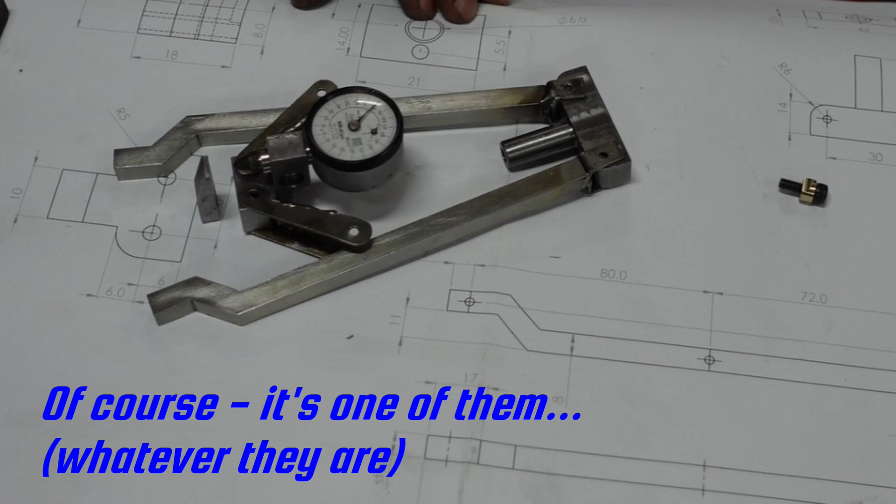G'day. Today I'm building a new tool which will hopefully help me measure diameters, particularly in a situation I'll get to in a moment. I've got several ways of measuring diameters here in the workshop, and I'll show you a few of those, but this is something I've been trying to work out for probably 4 or 5 years now, so it's a long time coming. I'm a bit time poor at the moment, so I haven't finished. Sorry about that. I'd like to get things done in an episode, but sometimes it doesn't happen, and there are lots of parts in this one.

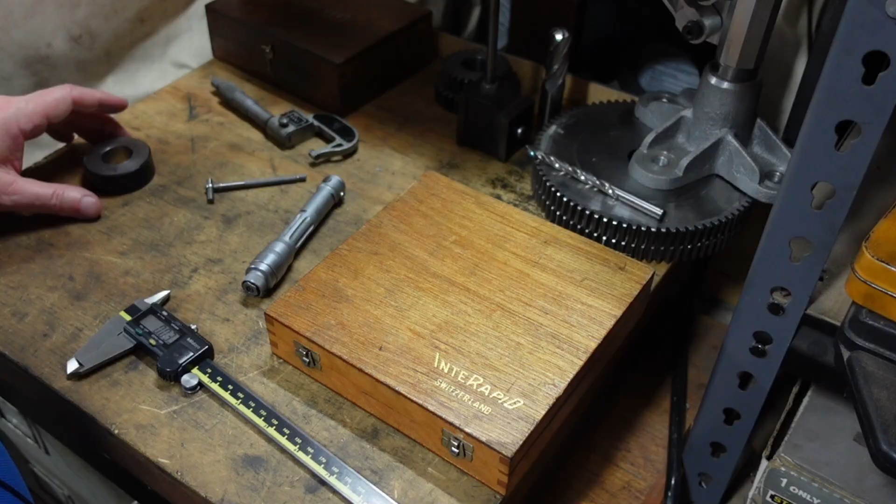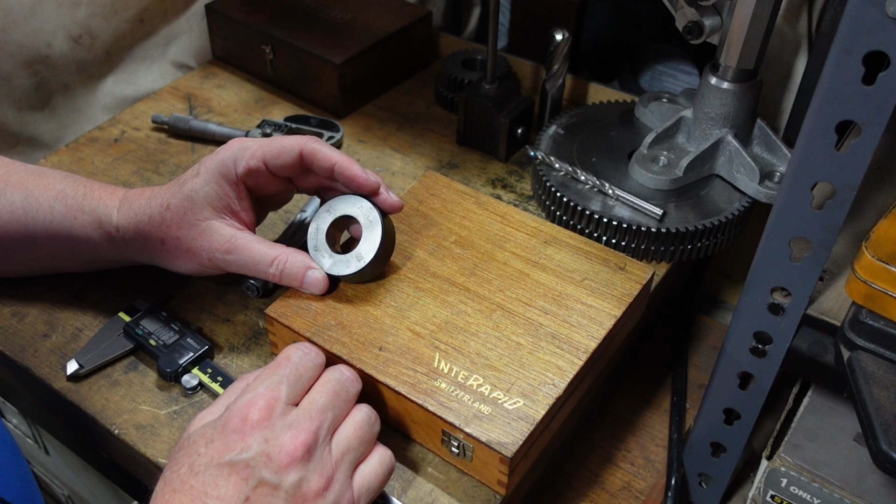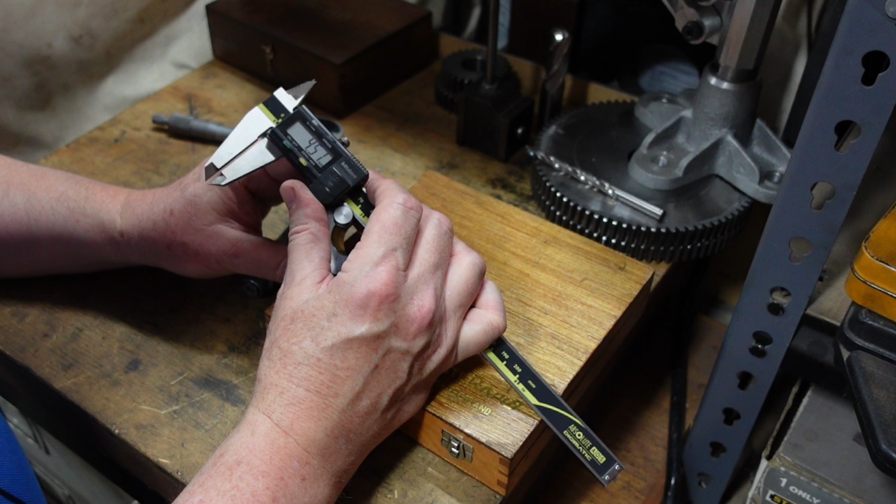The diameters I'm talking about measuring are internal diameters. External diameters are easy, just use a micrometer for those. But measuring internal diameters accurately, so that you can achieve a good fit, can be tricky. Usually I want to get a close fitting shaft in there, so I need to measure better than 0.1 of a millimeter, and that's the problem. I can use something like these calipers, but the uncertainty is something like 0.05 of a millimeter, so probably not quite good enough. And if you're not careful and put too much force on them, you can get a false reading. This is a 25 millimeter ring gauge, minus 9 microns, so it's 24.991, but I'm getting 25.01 there, so maybe not such a wonderful way of doing things.

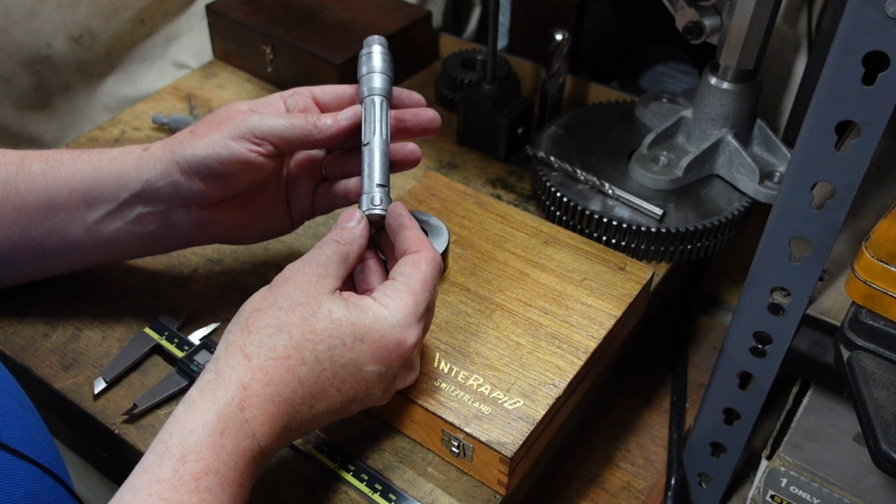A recent addition to the shop are these things. These are 3-point micrometers, ball micrometers, Intrimik, there's a whole variety of names for them. Holtest if it's a Mitutoyo. That's saying it's 0.04 of a millimeter underneath 25, but you can see there's a little bit of wobble there, so I can probably do that again and get a little bit better. That improved me by about 0.01, but that's another way I've got, though it's only a recent addition.

Once upon a time I used to try and use these telescoping gauges. Trouble is with these, even using the appropriate wiping technique, I could usually only get to within... see, that's 24.92. I couldn't get the accuracy out of these that I wanted.

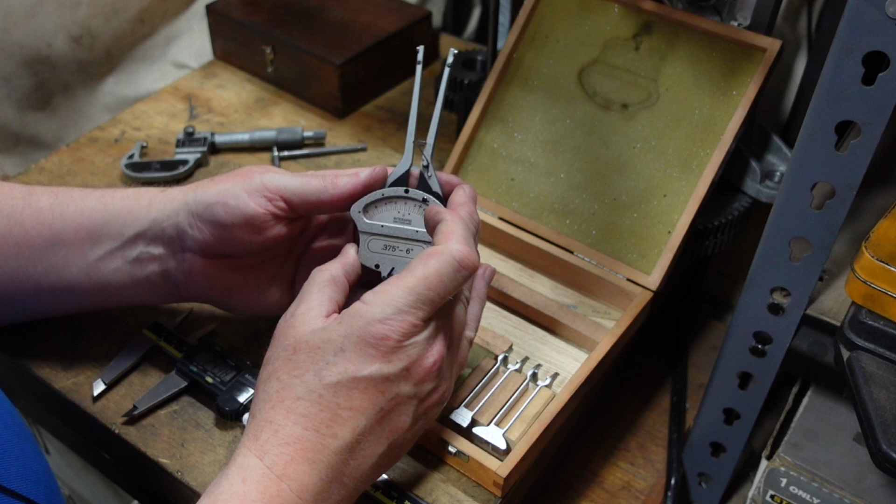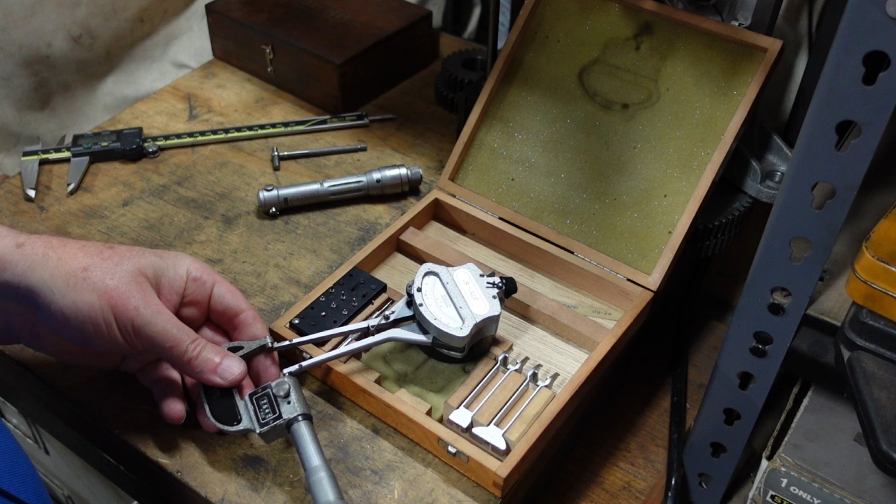Then I got one of these, which I bought second hand a number of years ago. This is an Interapid IRA 2A. They come in both imperial and metric. The way these work is you put the thing you want to measure down, and you wind out until you get the needle on the graduation. Then you come along with a micrometer and measure that, winding until the needle goes back to 0 again. And that's saying 25 on the dot, which is about what it should be. So this is extremely accurate. It goes from 3/8 of an inch up to 6 inches, or 9.5 up to 152 millimeters.

Really nice. However, there is one drawback to it: if you're boring something on the lathe, or even with a boring head, you've got to have the clearance to get it in. So this build is basically a homemade version of this, but with pins coming out of the bottom so that I can sneak it in and measure that way.

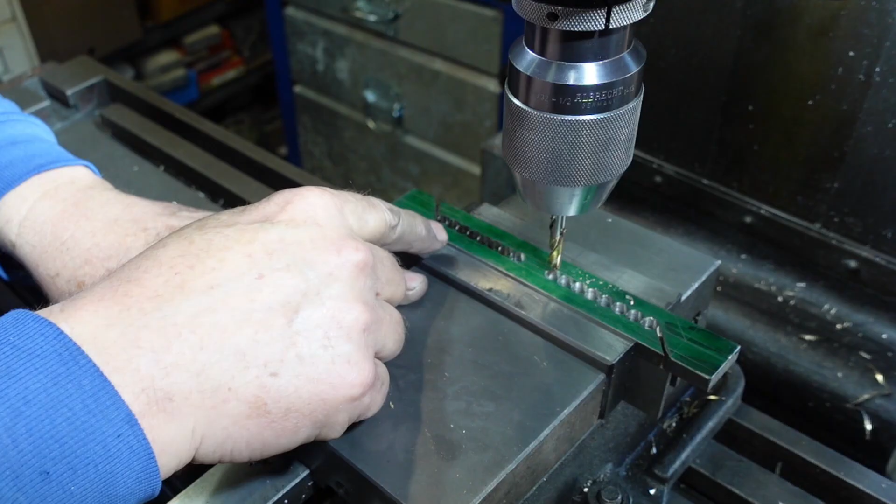The two legs I'm making are basically mirror images, so to conserve material I've got them nested inside each other, put a slice in here with the angle grinder, and now I'm chain drilling through. But I'm going to run into trouble soon because there'll be nothing holding these two things apart. If I'd thought about this before I started, I could have put it on a couple of blocks and clamped it down so there's no crushing pressure, or done the drilling before putting these cuts in. But what I'm going to do here is just take this out and use an angle grinder for that final bit.

Just a trap that I nearly fell into — when you've got stuff in a vise, be careful how you take material out.

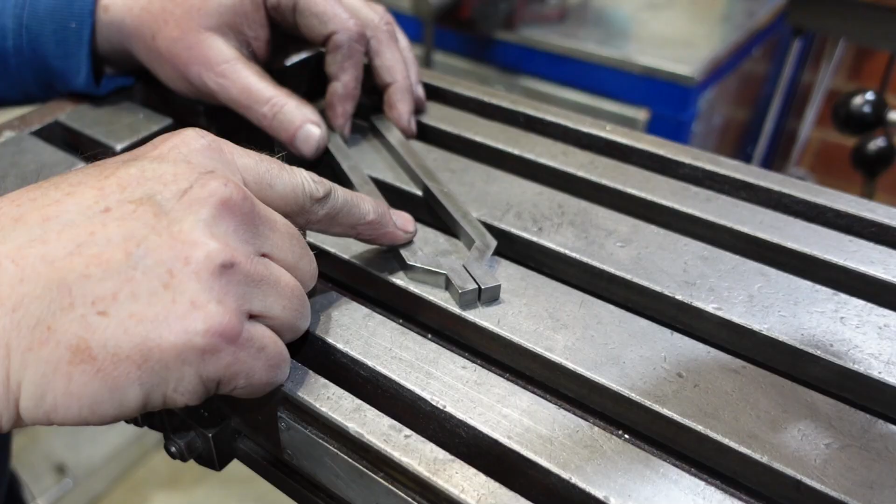Once I've got these out, I'll smooth them up, and they're roughly an L shape, as you'll see. These are the two legs that I need; this is just the machined part. I need to put a bracket on here for them to pivot on. The reason they're offset like that is there's a bit of stuff that goes in the middle, so that's necessary — otherwise they would have been straight.

At one stage I was contemplating making those out of key steel, but then a friend of mine said I should do them out of stainless. Yeah, stainless is one of those things that does what it's meant to do, but it's also a pain to machine at times. So I need to weld some brackets on and then make up a few little bits and pieces that go in the middle.

These come with a couple of holes in there. If this was a proven design, I'd put the holes in, put a pin in there, and use that to machine these. As it was, I just clamped them together and then clamped them in the vise and machined off these surfaces. But that was purely because I don't know exactly where those holes are going to be or what they have to do.

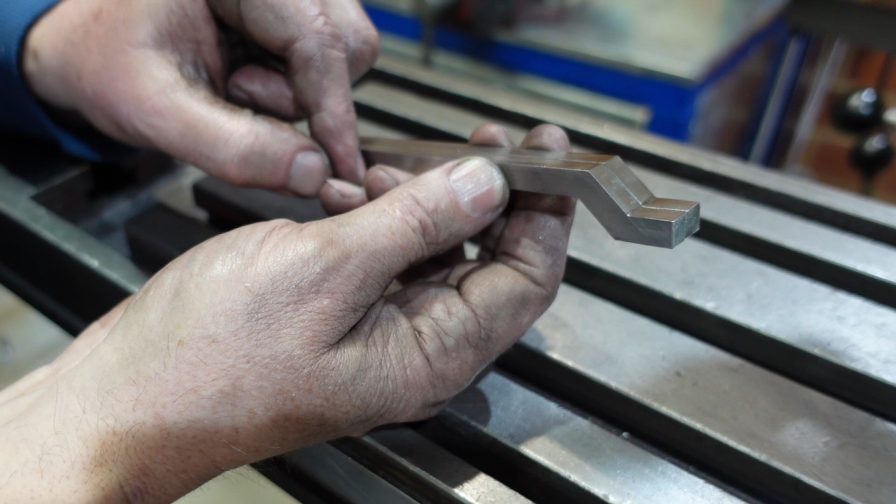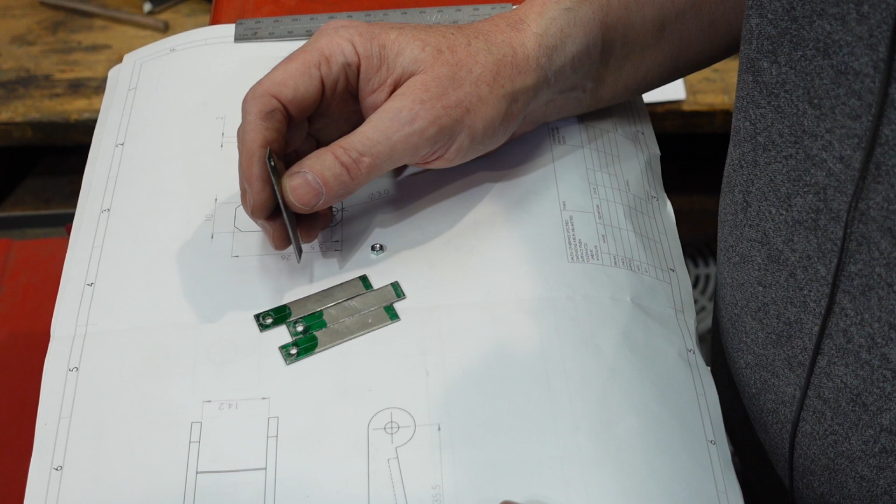So it's another one of these feel-your-way sort of projects. Sadly, I've designed this tool needing a couple of linkages. They're a funny looking thing, and I guess if this was a production tool, you'd make up a press tool and stamp that out. As it is, I'm going to have to just fabricate them.

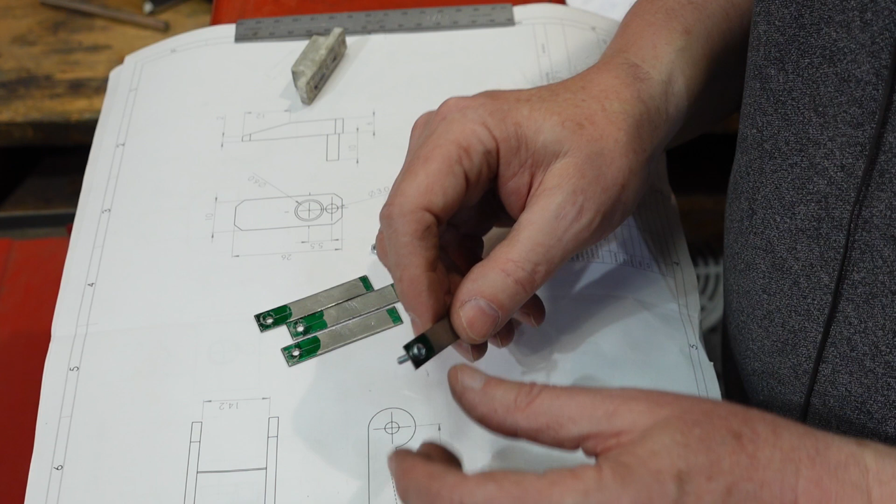What I've done is I've drilled the end holes in the 4 linkages. I'm now going to bolt those together with an M3 bolt, so it's a close fitting hole, then drill the other end, and that way I'll get the holes in the linkages the right length. What I'll then have to do is make up a spacer so that when I weld these 2 linkages the right distance apart, the spacer will enable that and allow me to get these 2 holes in the right spot, rather than having one hole there and one hole there, or whatever the story is.

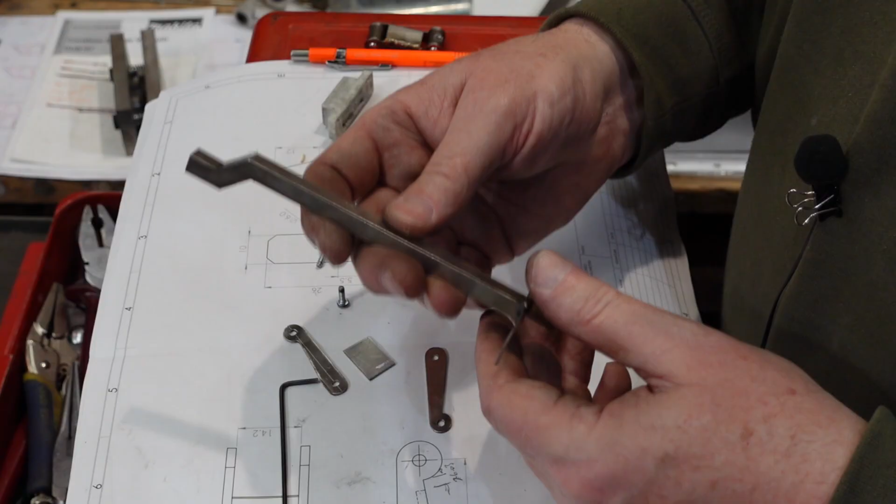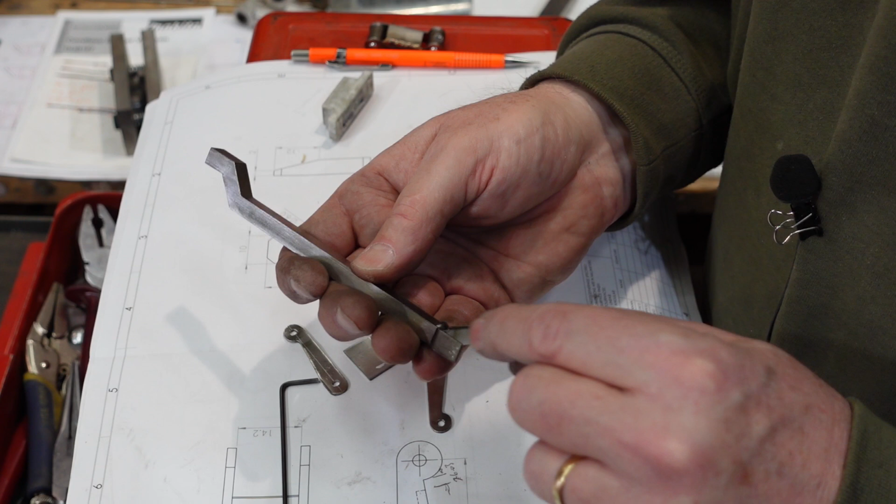On these long legs, I want to put a little U-shaped bracket. So what I've done is I've bent up a bit of strip, just welded it on there, and then I'm going to fold that over when I've got a block the right height to get the right gap in there. I'll put a hole before I do that, and then I can just drill straight through into that one and try to get those holes lined up.

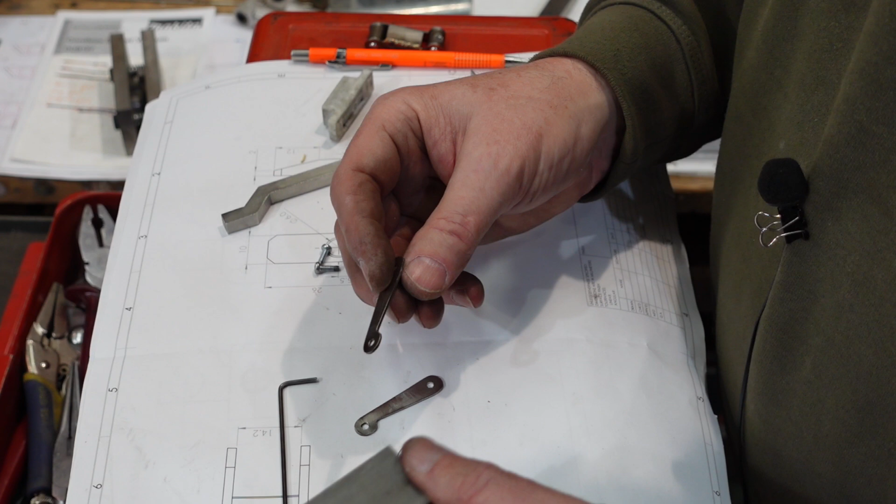On these things, they're meant to be sort of 2 parallel bits like that with that in between. There are 2 ways of doing that. One is I could make up basically an L-shaped block with a couple of tapped holes, secure those either side, put my plate in the middle there, and weld away. Instead, what I'm doing is I've got a block - not steel, because the stainless will weld to steel quite readily - so it's copper, I think.

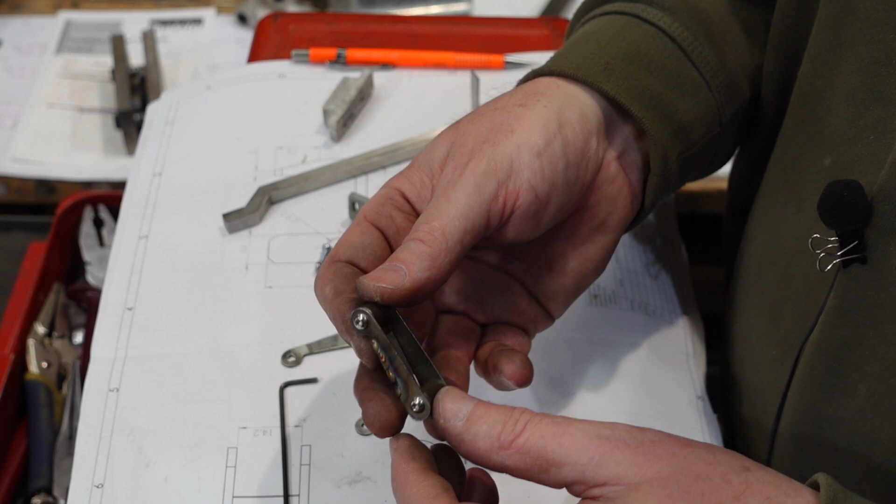I've got a number of copper and aluminium blocks around the place, which I use for that reason. Holding that there, weld that up, and then what I'm going to do is get a couple of spacers like that, and then weld that up, and that'll give me the precise spacing I want in there, and give me that bracket that I'm after.

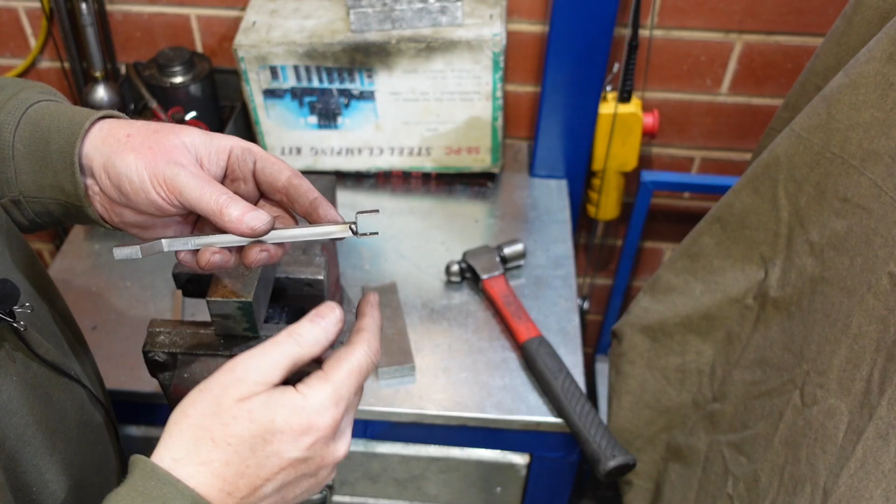I bent this down. That's the block that's going to be turned into a part that sits in there. And confession, I was using a blunt cutter on this, so it's a little bit undersized, about 0.15, 0.2 than I'd like - just as well I did it this way. So the way I did it was, basically clamped that in there. I have a spacer piece here, which is the same material, just there. Clamp that in the vise, and then with the hammer just knock that over, and that's enough to form that.

I won't bother drilling the hole in there and trimming those to length and all that sort of thing until later - that's when I have some other holes to drill in here - but for the moment, just getting those done is good, because it means I can then machine this block down to the size I want.

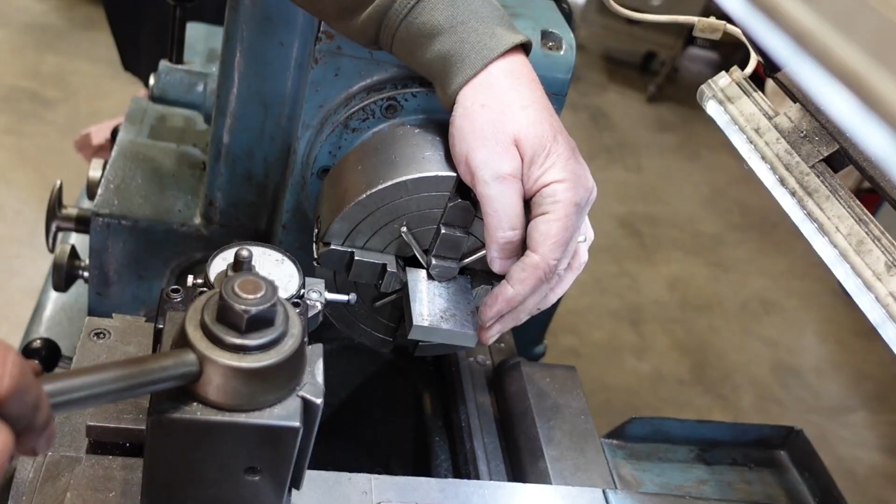I want to turn effectively a spigot on the end of there, 25 millimeters long, diameter 8, 10, something like that - I'll need to check the drawing to see what that says. So I squared this up, or sorry, centered this up in a 4-jaw chuck. I've had to use my little jigger thing so it doesn't slip down the hole in the chuck drawers.

When doing this - and this is the reason I'm saying this, because I did this once - if you're doing square stock, it's not such a problem. But once upon a time I was centering up some rectangular stock like this, and I just pulled the lever back to go around to the next side, and then I wiped out the end of my indicator. So that's something to watch for. If you have to do this, don't back off the cross slide, just run off the end, turn around and run back on. You also need to wiggle that until you find a minimum on your indicator.

Other than that, centering up rectangular stock like this isn't too much harder than doing square or circular stock. That's my block with spigot.

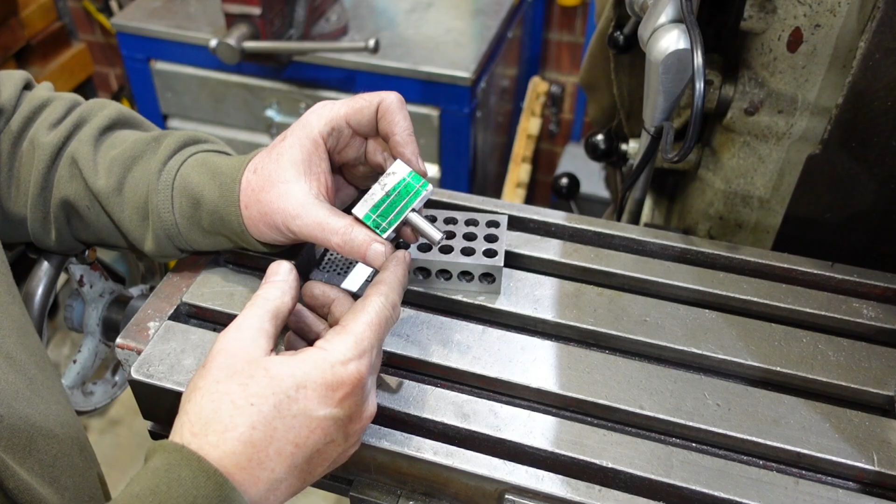You saw me setting up to do that. I didn't bother showing you turning that down because that's pretty simple. Similarly, I didn't show myself drilling the hole in the end there because that's pretty simple.

That's 5.5. I'm going to bring that out to 6 so it's a nice fit. This bit of material here is going to be trimmed off. This is just excess, I put it there so I had something to hang on to, and it was just the size of this bit of scrap I was using. So to do that, I actually got my 1-2-3 block out, put that in there, and used that as a base to scribe that. That means it doesn't matter whether this deviates slightly, 0.1 or 0.2 millimeter out.

I'm measuring from this face here. I've centre marked a couple of holes there. I'm going to drill those, and then put a dowel in them, something I've always wanted to try and don't think I've ever done, but use that to put a radius on that corner there using a vise in the mill.

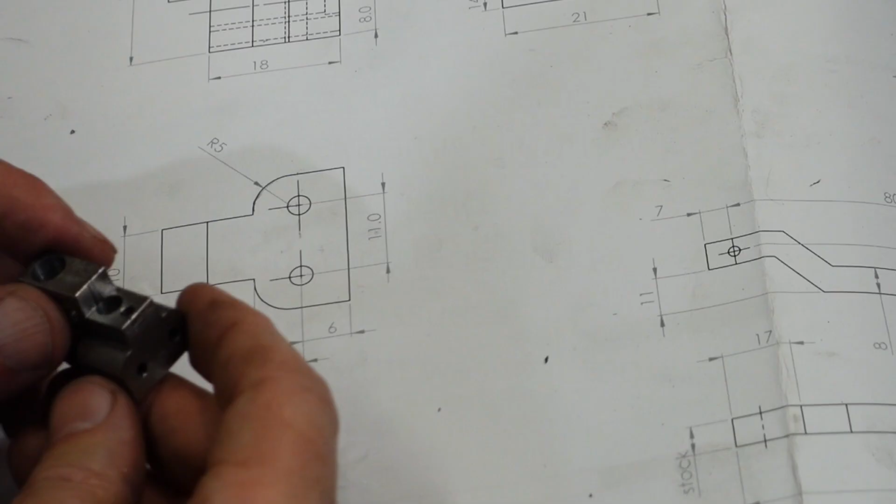This build has lots of little pieces in it. This is probably one of the more complicated ones, not so much because it's got any tricky machining to it, it's just that it's got a lot of stuff on it.

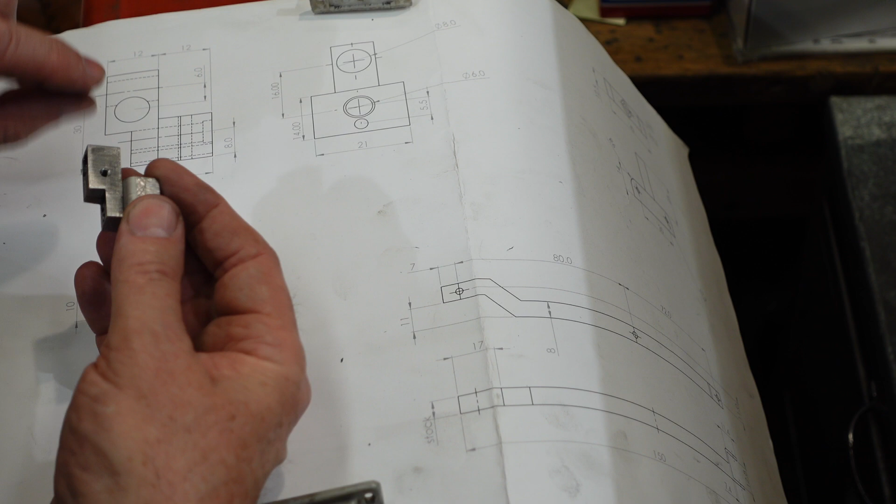This started off as a block of material. I took out this piece, and then the two sides here, those bits. Then it was a matter of putting in the half cotter there to hold the dial indicator, and then the rest of the holes, and finally putting the radii on the corners there.

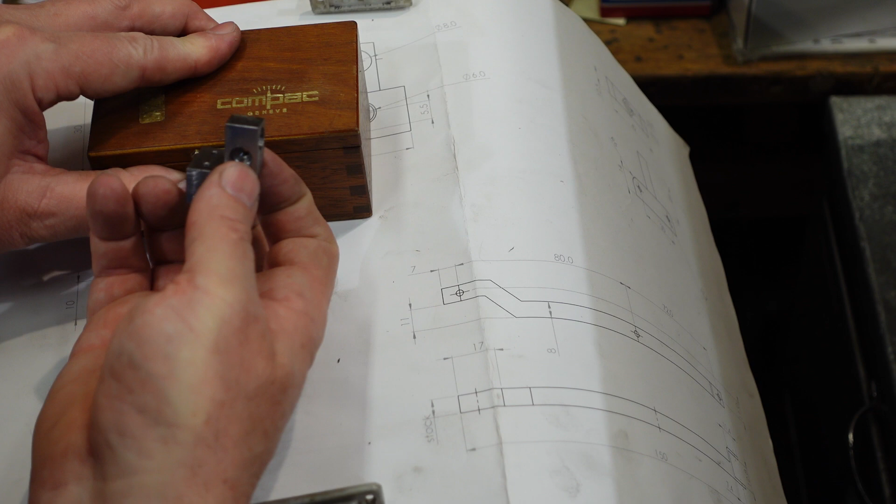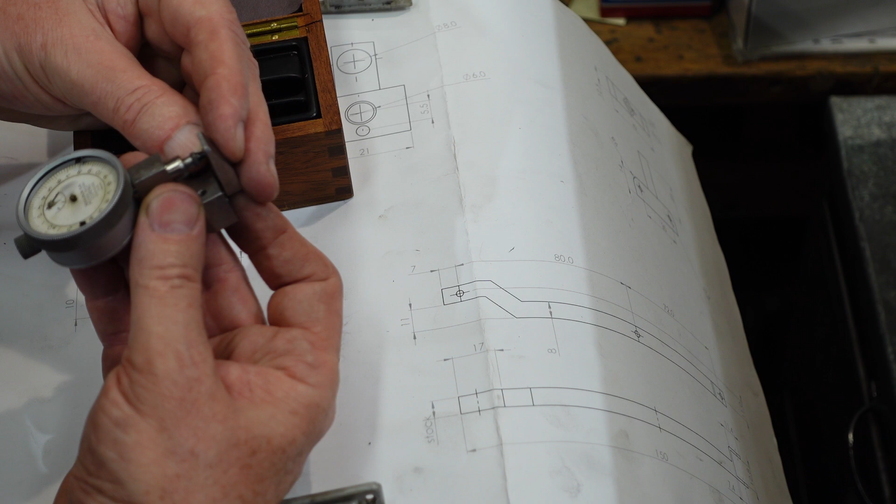The indicator I'm going to use is a Compac one, and I do have a Mitutoyo one as well, but that has to go in like that. That should be better. And then there's another little piece, this one, which comes on and needs to hit on that. So that's the basis of what I'm doing here.

The machining continues. I'm just showing you this because I now want to do the sides here. I've got the situation where I've got a step there, and if I just try to knock that down onto the parallels, it's not going to be very easy. So I thought I'd just show you this.

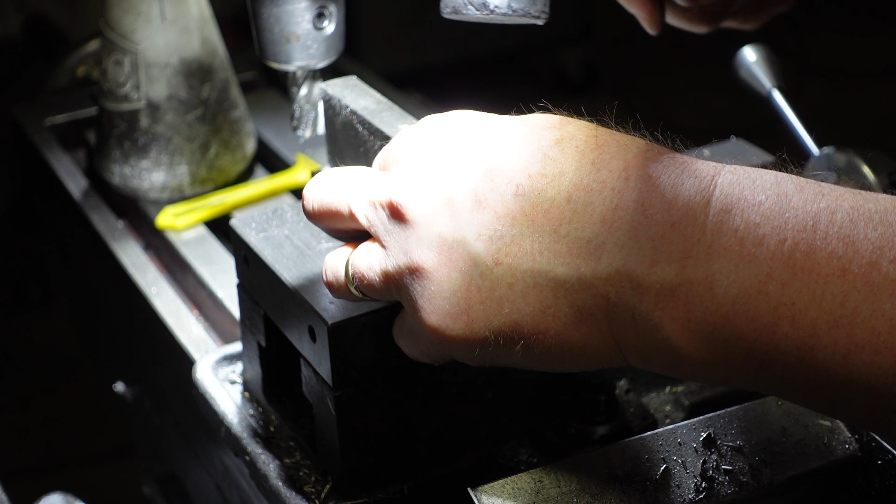This is just a block of steel of some sort, I think it's a bit of stainless, but it doesn't matter. What I'm doing is using that as a spacer to knock that down. So if you ever got that situation where you've got a small step or a small part you can't quite get in there, get yourself a block of something and use that to put it down onto your parallels.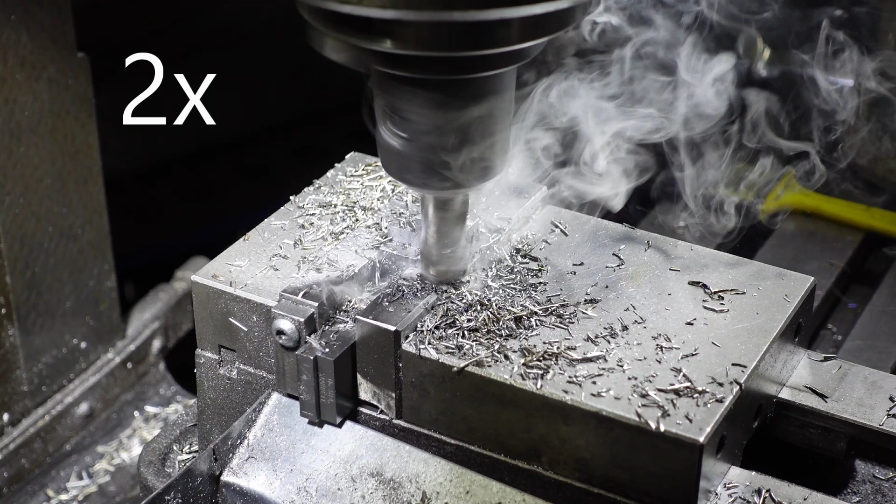I'm about to start drilling my vertical holes through these surfaces, but before that I drilled a flat bottom hole halfway through, and I've got a brass bush in there, that's for a cotter to hold the indicator stem. I'm now going to mount that up, use that as a convenient step, and then drill my hole through there, and there's a third one there for a little dowel pin.

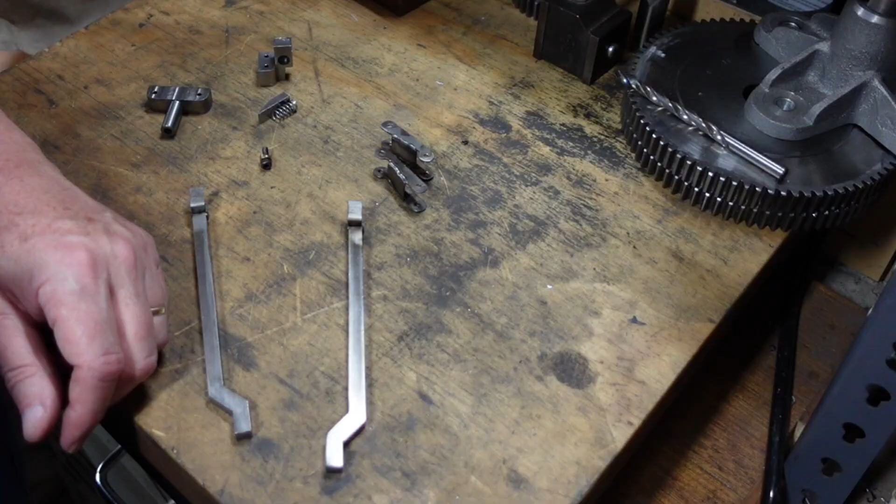This is where I am now. I've got my two legs and a clevis on the back there. Looking at that, I'm not quite sure whether that's going to be strong enough. I may have to take that off at some stage and make something better, but it is what it is for the moment, and certainly good enough to try out.

I've got a block on the back there which that'll pivot on, like so. And then, I haven't got any holes drilled there or anywhere else in here.

That's coming up. I've got here the most complicated thing I've done for quite some time, and that's the block that holds the indicator, and it also pivots. I've got a couple of brackets there, and these could be machined, but these were welded up just because that's what I was doing at the time, and I thought that's a good idea.

That sits in there, lines up with the pins, and the pins I've still got to put in here, by the way.

Right, I've got a little doozer flicky here on the end to push the end of the indicator. That's the clamp for the indicator, and then there's a spring in there.

The way this is going to work is once I've made up that central rod, that'll get screwed onto here, and as I wind a nut on the back here out, these things will spread out. As soon as it encounters any resistance, these will stop, but winding on the nut will cause the shaft that goes through the middle to pull up, and that'll hit the indicator end and give me an indicator reading.